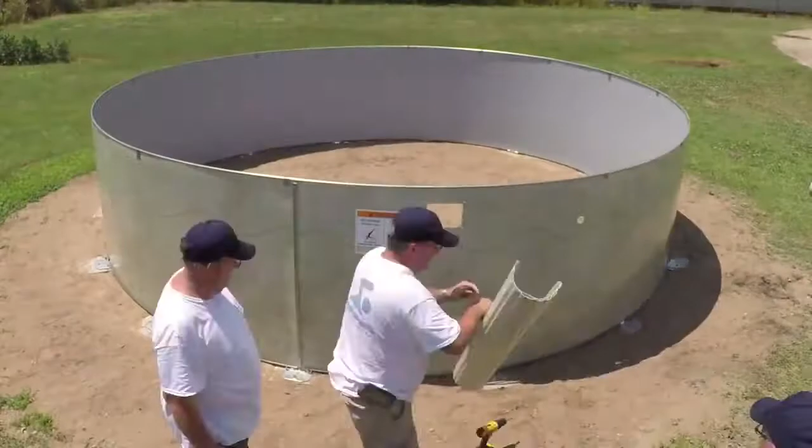It takes 2 to 3 days to install your pool, and it's important that you take your time. If you intend to have an optional special purpose deep swimming area, you'll need to allow more time for your pool installation. HII is not affiliated with any professional pool installer. Therefore, HII can assume no responsibility for errors in installation by either the homeowner or by said professional installers.

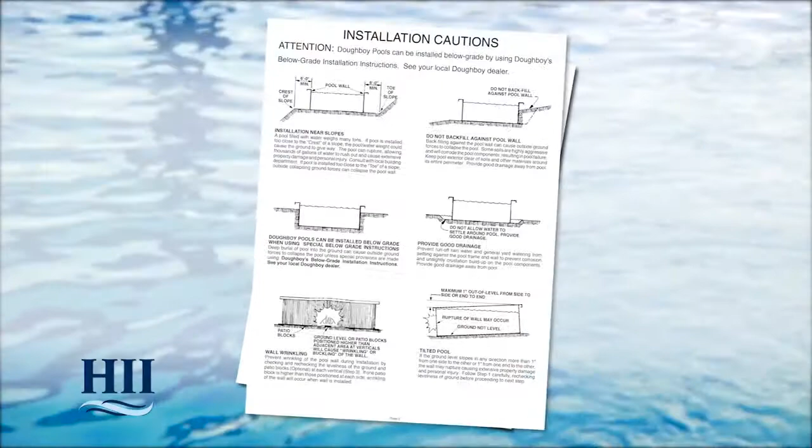If you have the pool installed by others, please supervise the installation process to make sure they comply with the steps we've shown. This installation video is designed to supplement HII's pool assembly and installation instructions for your style of pool. This video does not replace the written instructions.

Be sure to read all instructions, including those for accessories such as filters, pumps, and skimmers prior to starting your pool assembly. Check to see if building permits or utility clearances are required, and obey all codes for fencing and electrical safety.

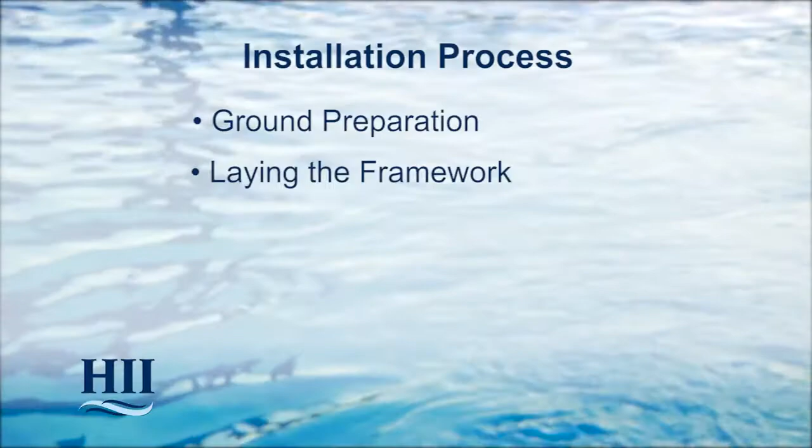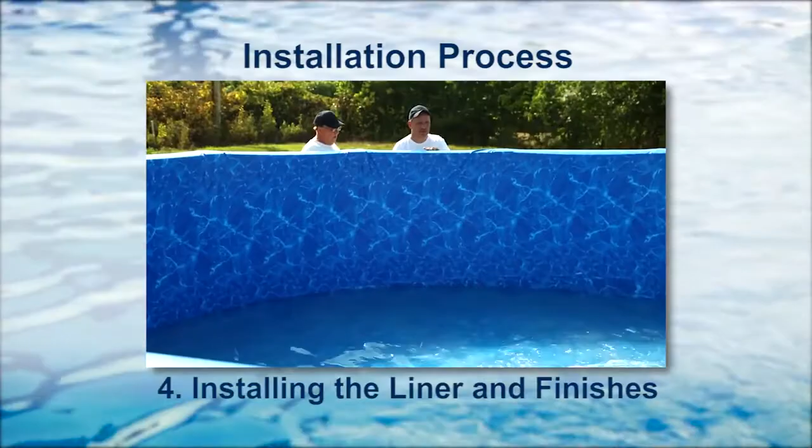The installation process is divided into 4 parts. The first and most important is the ground preparation. Second is laying the framework. Third is installing the pool wall. And fourth, installing the liner and finishing the pool. There are 2 important pieces of information you'll need to have available at all times. The first is the parts list, and the second is the round pool assembly and installation instructions.

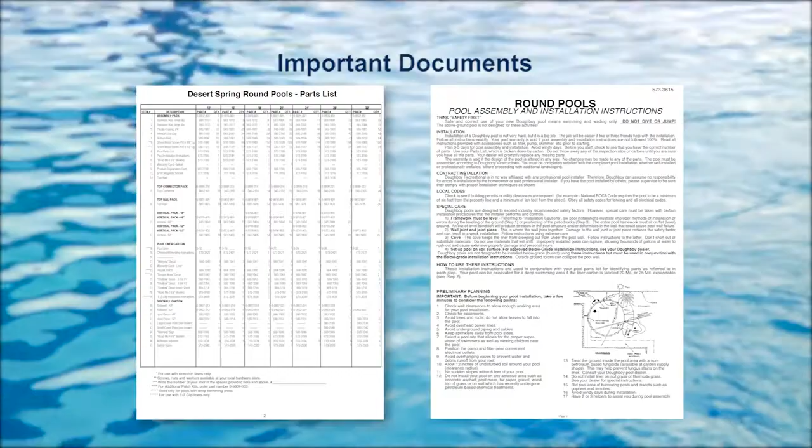Placement of your pool is a very important decision, and there are a few things to consider. Never place your pool under power lines, and stay clear of overhanging eaves which will allow rainwater to run off into your pool. Do not place your pool under trees that will shed leaves into your pool. Choose a spot with convenient electrical outlets for the pump and filter systems, and make sure there are no sprinklers in the area.

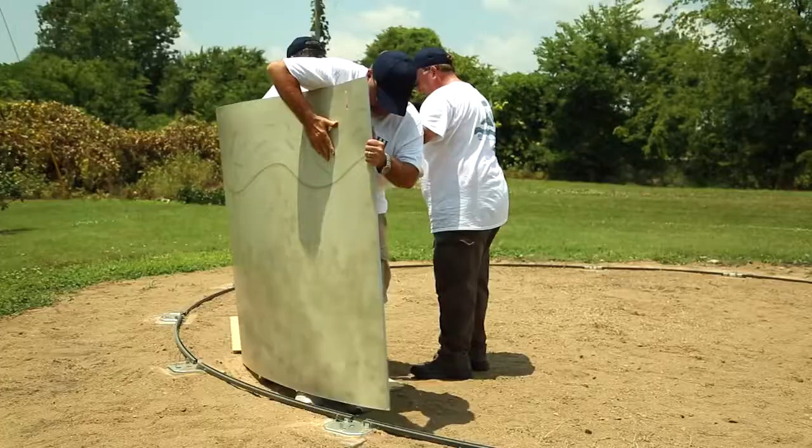Realize that where you begin to install the pool wall is where the ends will meet and is also where the skimmer and returns will be located. You'll have the choice between 2 coves, packed earth or preformed manufactured. If you choose the earth cove, you'll need enough earth to build a 6-inch by 9-inch cove around the base of the pool wall. This video will go into greater detail about the cove later.

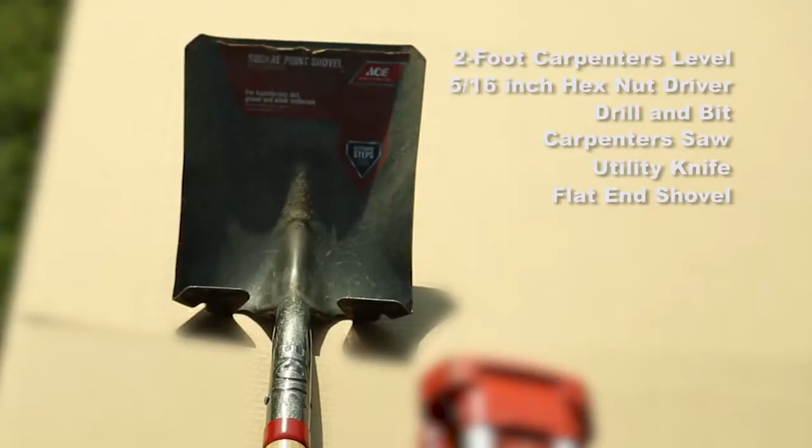In addition to the following tools, check to make sure you have the tools listed in your pool assembly and installation instructions before you start the installation. You will need a 2-foot carpenter's level, a 5/16-inch hex nut driver, drill and bit, carpenter's saw, sharp utility knife, and a flat end shovel to help with a more precise excavation.

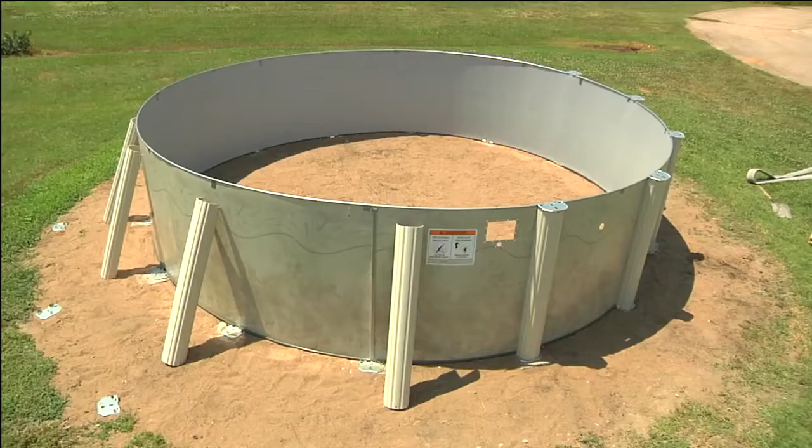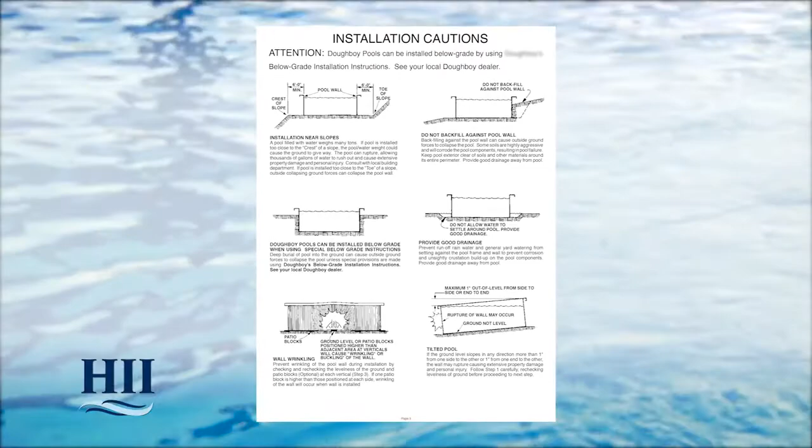A transit or builder's level is recommended to help with leveling the pool site. 12 by 12 by 2 patio blocks can be used under the verticals for additional stability and a more finished look. It's important to review the installation cautions portion of your instructions to see examples of things to avoid during the installation process. The pool design you have chosen is a round pool. Some of the sizes are different, but the parts all go together the same way.

For the round pool layout, you'll need to measure the diameter of the pool plus 1 foot for additional clearance. Begin by pounding a stake in the center of the chosen pool area. Then measure and mark out the appropriate clearance radius for your size pool, found in the pool layout dimensions section of the instructions. Next, remove all sod from the marked pool area. Your entire area should be within 1 inch of being perfectly level.

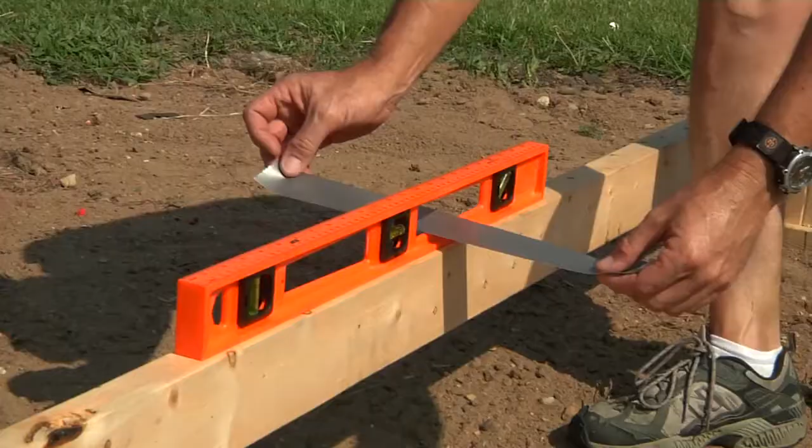It's very important to have the entire pool area as level as possible, so we're going to show you how to make a leveling tool. Drill a hole in the end of a 2x4. The length of the 2x4 should be the same as the radius of your pool. Attach the 2x4 to the center stake as shown. With a level taped to the 2x4, find the lowest area in the pool and remove all high points. Do not fill in low spots. The ground in this area must be firm.

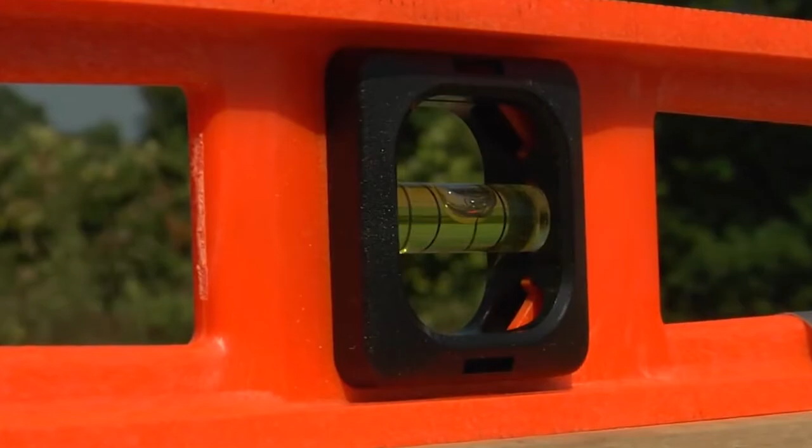Using your leveling tool and a square shovel, clear a 1 foot wide strip until you have a level reading all the way around the pool. This is where the pool frame will be installed. Remember, the entire assembled bottom rail framework must sit on solid ground that is within 1 inch of being level from side to side.

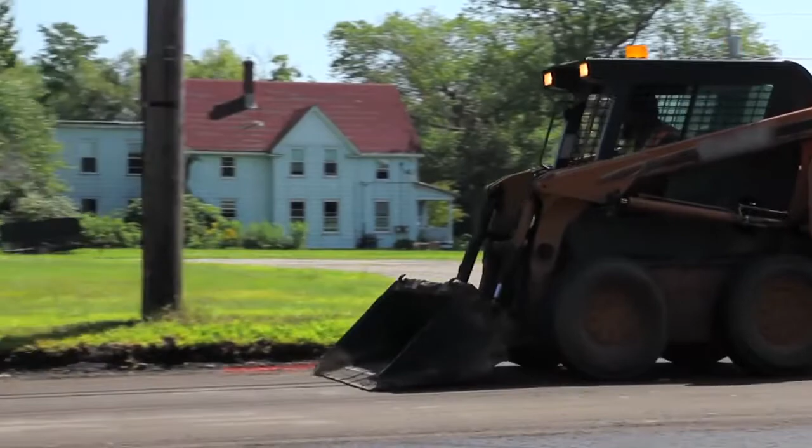And be sure that the entire level pool floor area is clear of any sticks, stones, tree roots, or any other objects that might puncture your pool liner. If available, you might consider hiring a contractor with a tractor or skid steer.

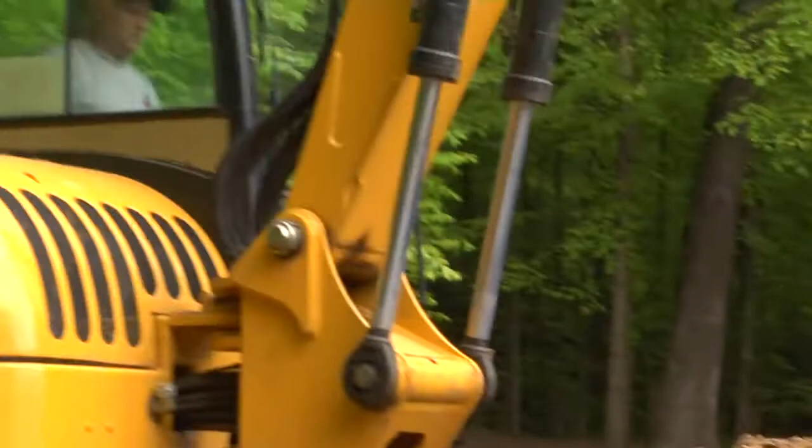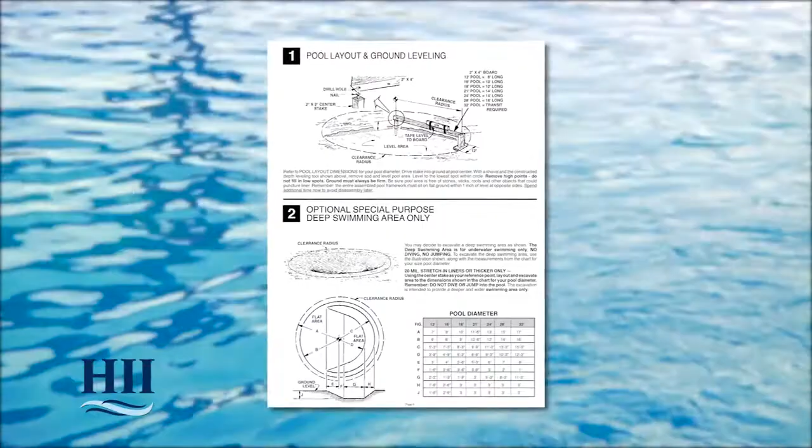If you have purchased a 20 or 25 mil thick expandable liner, you may excavate an optional special purpose deep swimming area at this time. Remember, this area is for underwater swimming only, no jumping or diving. For more detailed information regarding your optional special purpose deep swimming area, consult your instructions.

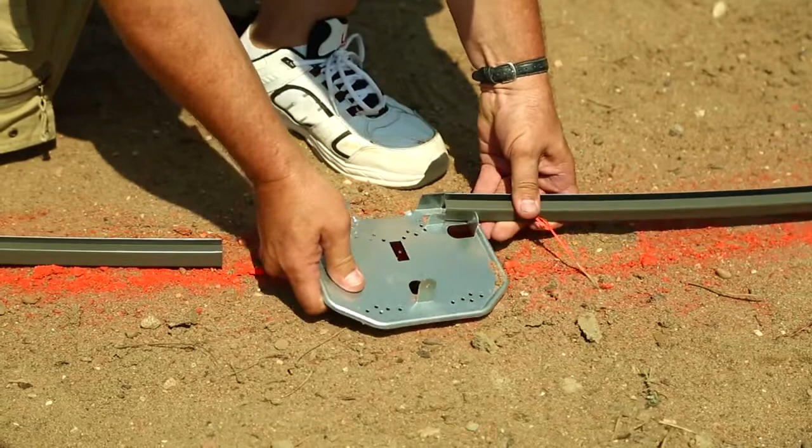Once you're sure that the pool area is within 1 inch of being level from side to side, you're ready to assemble the framework. This is a vertical end cap. This is a bottom rail. These will be used to assemble the bottom framework of the pool. Now construct the bottom framework by sliding the bottom rail's grooves up into the vertical end caps against the stop tab.

Continue all the way around the pool until all bottom rails are connected. With the bottom rails installed, check for roundness by measuring out from the center stake to the bottom framework. The distance should be the same from every point.

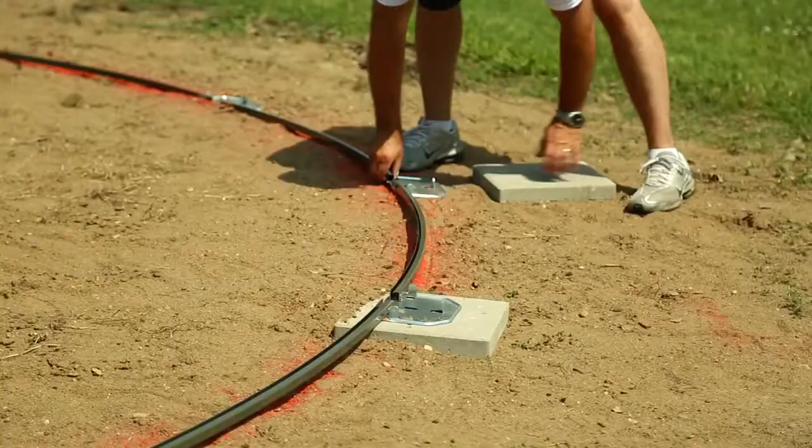Now that you have checked the pool for roundness and you can see where the end caps are, you can start installing the patio blocks. The top of the blocks must be flush with the ground and must be centered under each vertical end cap. To do this, mark out where the patio block is to be placed. Dig out this area.

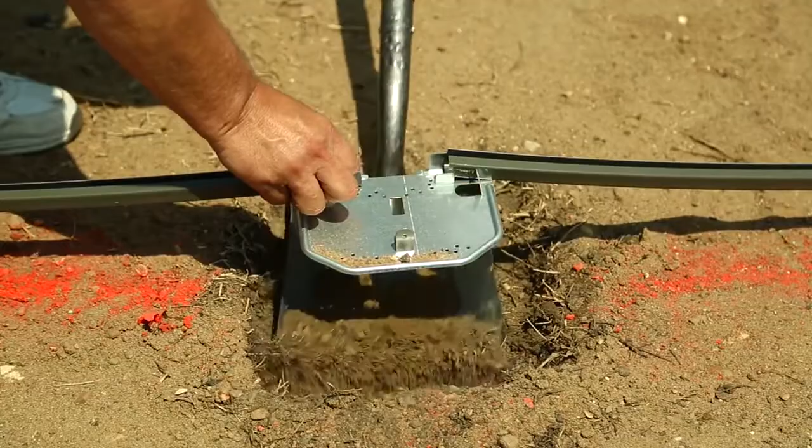Position the patio block and then check to see that it's level. If it isn't level, adjust accordingly until a level reading is obtained. For proper installation, it's also important to level from patio block to patio block, as shown here.

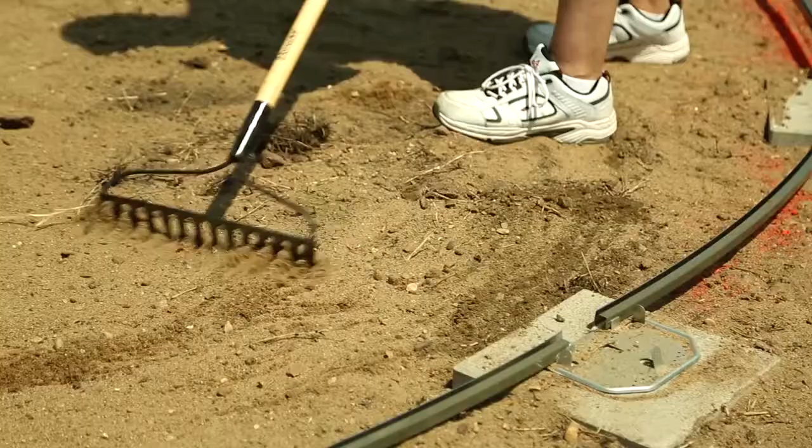Now that the bottom framework is assembled, make sure that the bottom rail is round and level before proceeding. Also make sure that there is no dirt inside the bottom rail. If there is, clean it out before proceeding. Before we go into the installation of the pool wall, remember to clear the pool floor area of any debris that could puncture the liner.

If you're going to use an earth cove, now's the time to bring the sifted earth into the pool area. Use a sifting screen to remove 1/8 inch pebbles or larger as shown here. When you're finished, remove one section of the bottom rail and wheel the earth into the center area. Once you have a sufficient amount of sifted earth, remove the wheelbarrow and replace the bottom rail section. You are now ready to install the pool wall.

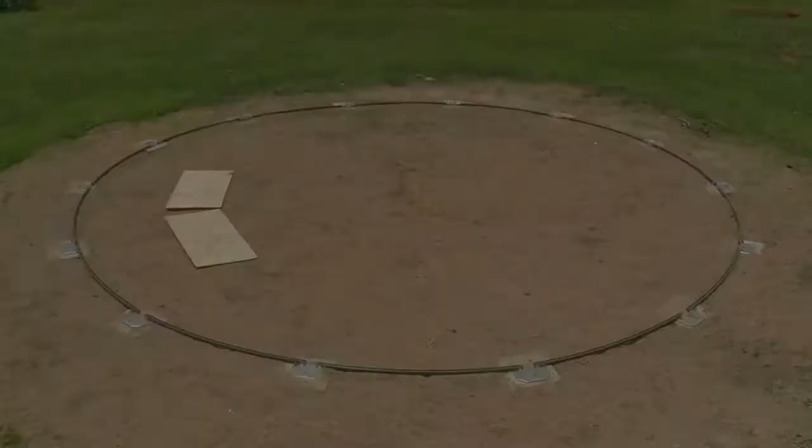Before you remove the pool wall from the carton, take note of weather conditions and do not install your pool wall on a windy day. Place the wall carton near the starting point you selected during preliminary planning. Remember, you must begin the wall near an electrical outlet for the pool filter. Place the wall carton with the arrow facing upwards onto a piece of plywood. This will make it easier to move the wall during installation.

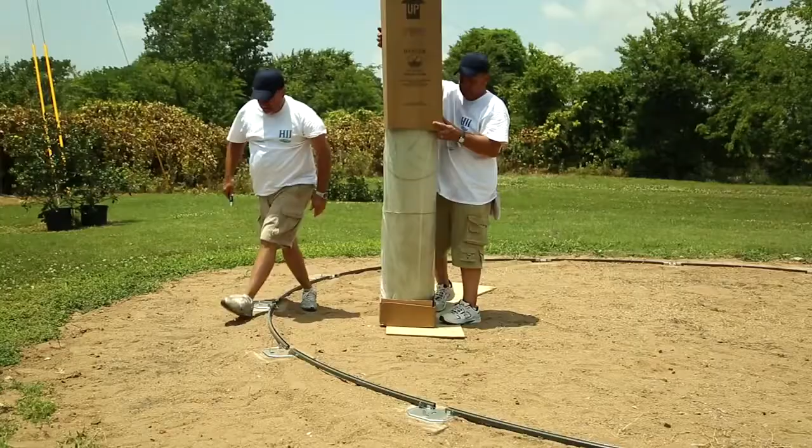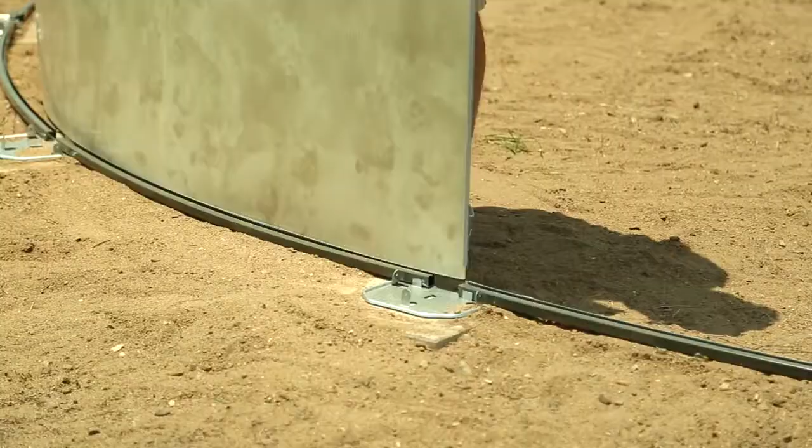Using a sharp knife, cut around the carton's bottom edge, then lift the carton over the coiled wall. Position the pool wall inside the framework and near the starting vertical end cap. Always start at the center of the vertical end cap so the vertical will hide the wall joint. Uncoil about 6 to 10 feet of the wall at a time and insert the bottom edge of the wall into the groove of the bottom rails as you go forward. Placing the coil on overlapping pieces of plywood will make it easier to unwind the wall.

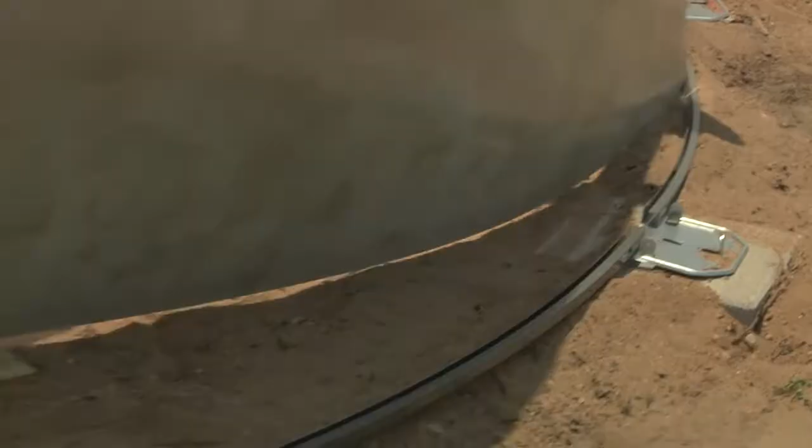As you unwind the wall clockwise around the pool, you'll find the skimmer and return openings at the inside of the wall coil. Place the stabilizer rails on the top edge of the pool wall. Work around the top of the pool as the wall is inserted into the bottom rails. Telescope the small stabilizer rails into the larger stabilizer rails about 6 inches. Temporarily secure the stabilizer rails to the pool wall between verticals using duct tape.

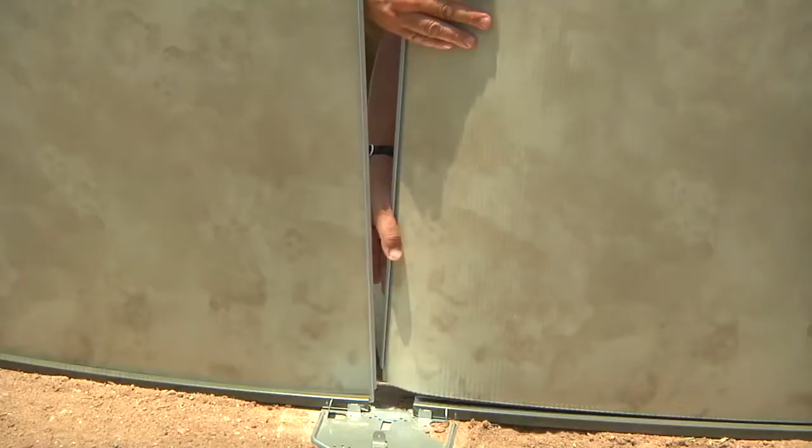Bring the wall ends together until they meet in the center of the starting vertical end cap. Adjust all of the bottom rails in if the wall ends do not meet. Bring the pool wall ends together to the inside bottom rail and align the formed hooks.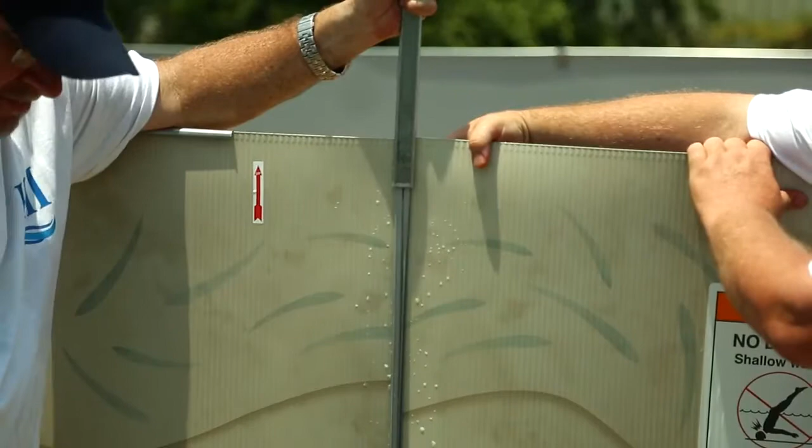Once the formed hooks are aligned, slide on the joint piece until it's even with the top of the wall hooks. This will place it a little below the top of the pool wall. Whatever you do, do not hammer on the joint piece. You may use ordinary dishwashing liquid for lubrication.

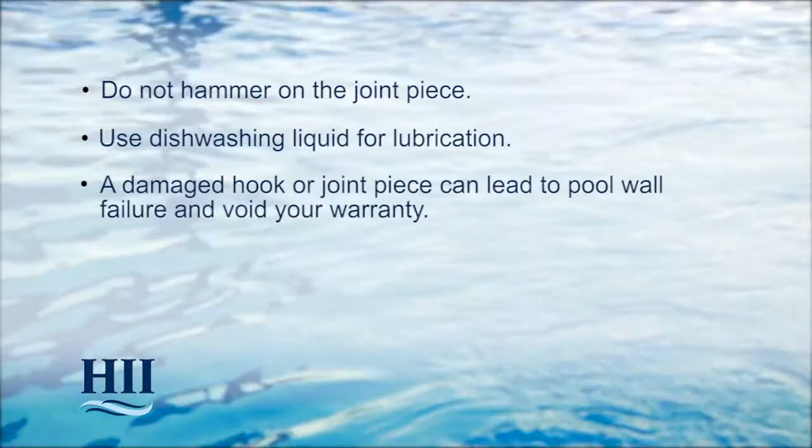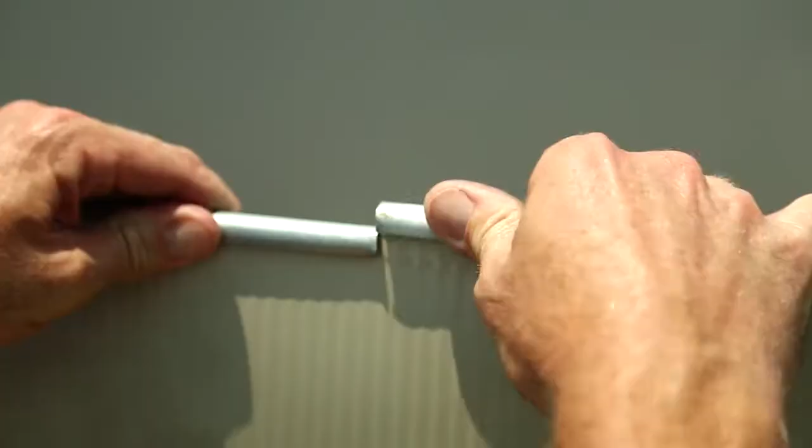A damaged hook or joint piece can lead to pool wall failure and void your warranty. Once the joint piece is installed, insert the wall back into the bottom rails. Place a piece of duct tape over the wall joint and reinstall the stabilizer rails.

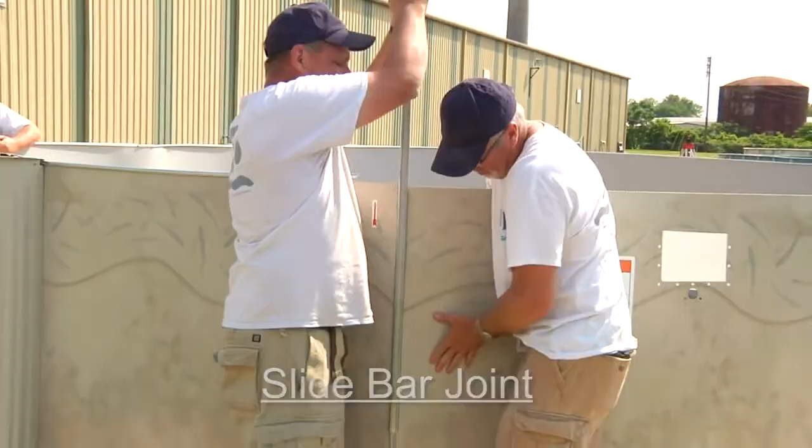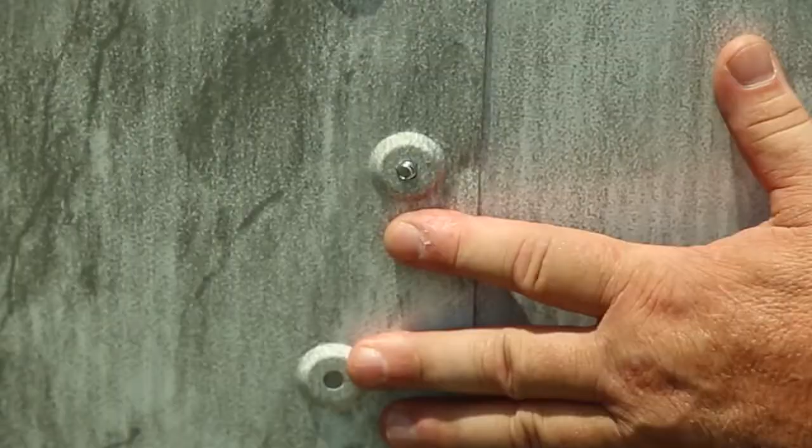HII manufactures several brands. As previously shown, one of our brands uses a slide bar joint to connect the wall, while our other brands use a nut and bolt closure system. This fastening system provides excellent strength and wall stability and has pool wall ends that virtually snap in place for proper alignment during assembly. This design also positions the bolt heads to be flush with the inside of the pool wall for a smoother liner installation.

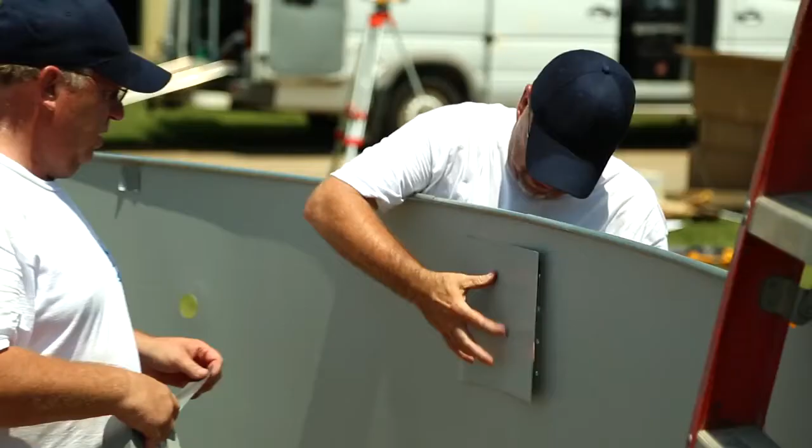Matching pool wall cover plates are provided with pools that have 2 skimmer openings. If you choose to use only one set, you'll need to cover the extra holes from the inside with the provided matching wall cover plates using duct tape. Be sure to cover all the inside edges and corners of the wall plates with additional duct tape.

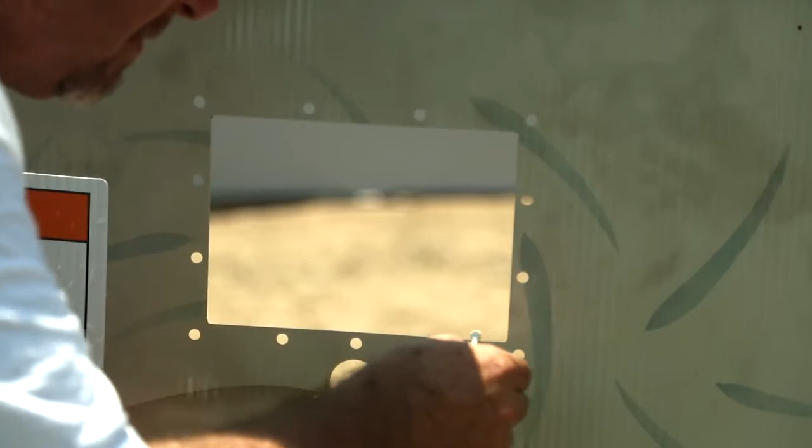Use a Q-tip or cotton ball dipped in fast-drying enamel to coat all bare or metal edges of the skimmer opening, protecting them against corrosion. Do not use your fingers to apply this coating, as sharp edges may cause serious cuts. Enamel must dry prior to installing the liner to prevent damage to the liner.

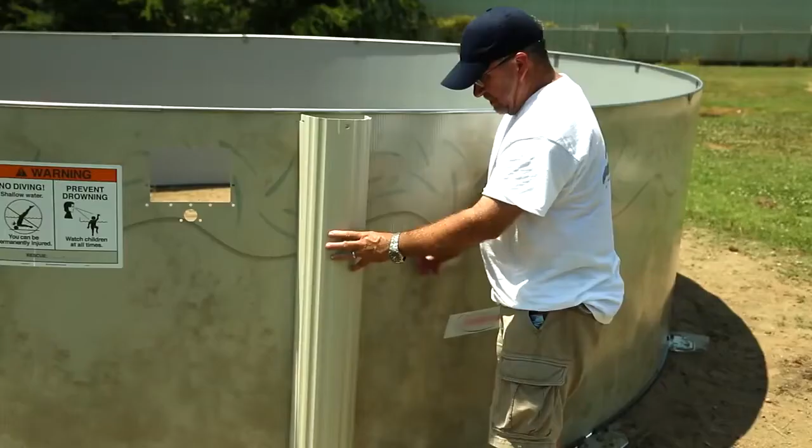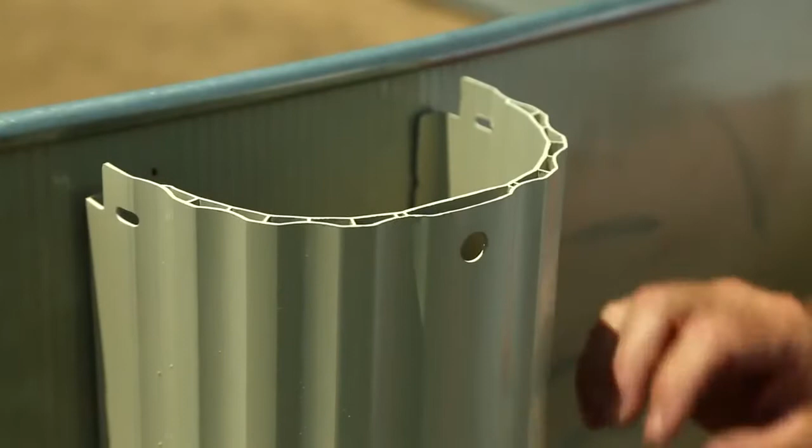Some pool styles have one-piece verticals, while other pools have larger top rails requiring three-piece verticals. To assemble three-piece verticals, simply slide the centerpiece into the grooves you'll find on each side section. Please note that 6-inch, 7-inch, and 8.5-inch top rail pool models typically have 3 holes at the top of the verticals.

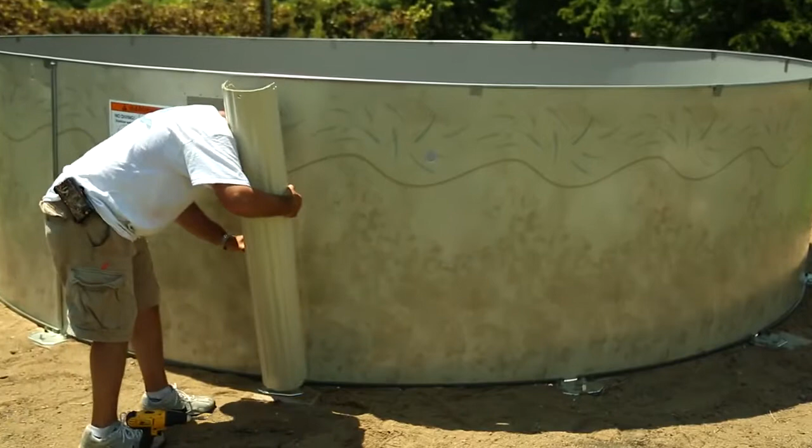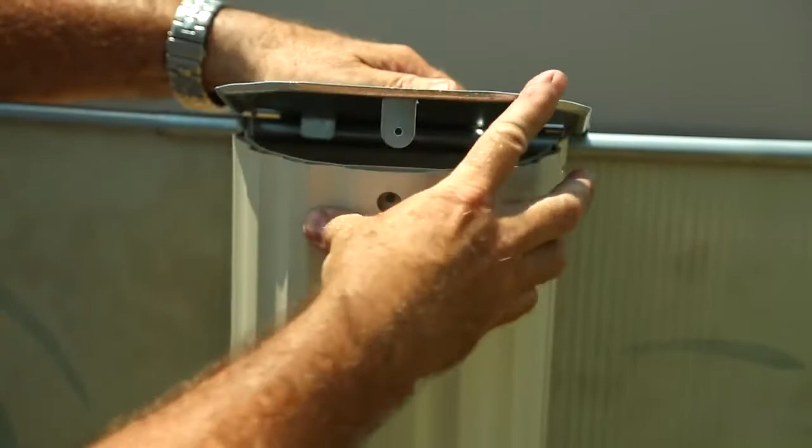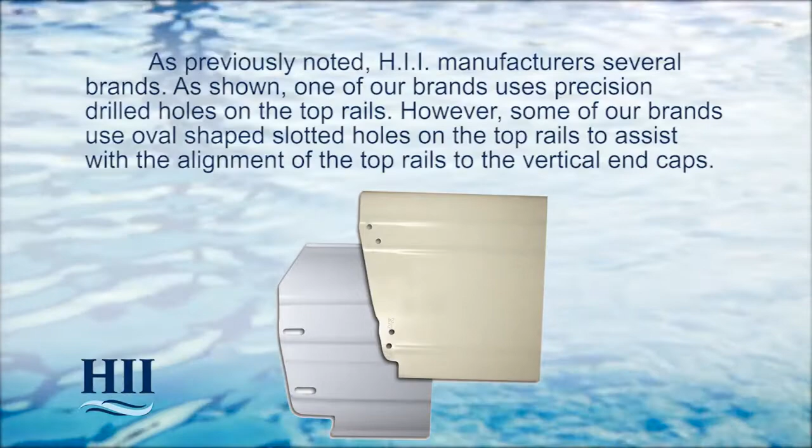Check the instructions for your style of pool and place the verticals over the tabs of the bottom vertical end caps and secure. Take the time to review the vertical and top rail details of the pool you chose in your instructions. Carefully follow figure 7, A, B, C, D, or E to attach the top vertical end caps to verticals. Check the pool for roundness by measuring the pool from side to side in opposite directions.

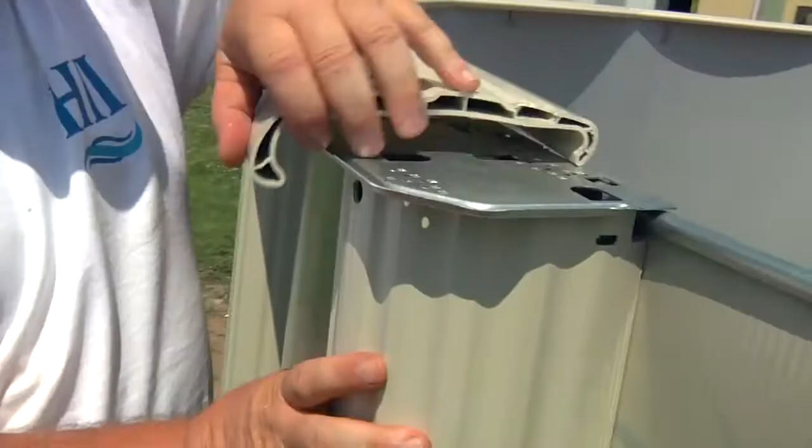Top rails attach between the vertical end caps. After referring to the hole selection chart in your instructions, use a felt pen to mark the holes appropriate for your pool size on the top vertical end caps and top rails. This will help avoid confusion when you attach the top rails.

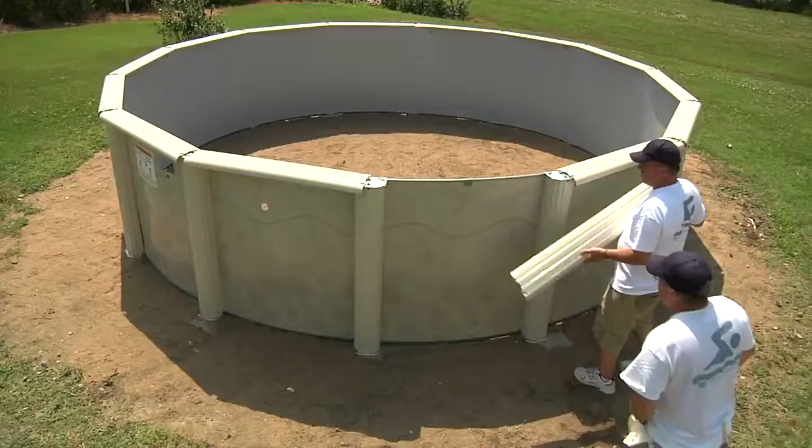Attach the top rails according to the holes that you marked, and be sure you're using the correct holes for your pool. Some pools have a bracket that attaches the top vertical end cap to the top of the vertical. Check the instructions to see if a bracket of this type applies to your pool.

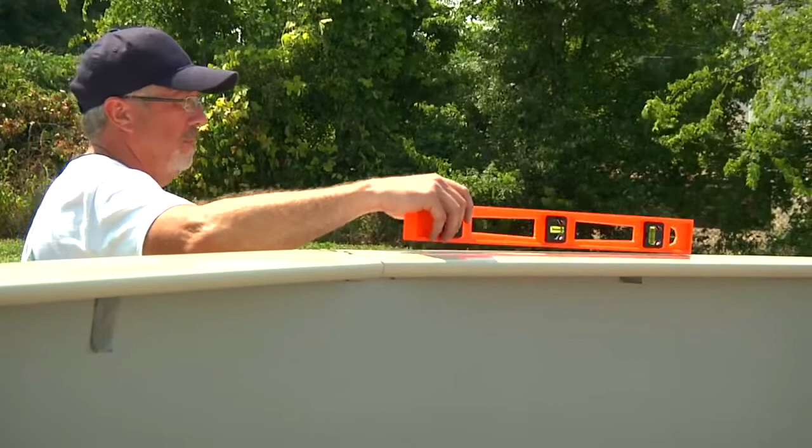After you've attached the top rails, it's extremely important to check the framework to assure a level installation. Place the level on each top rail, working gradually around the pool to assure framework is within 1 inch of being level on opposite sides. And remember, always remove dirt to adjust framework, never fill in.

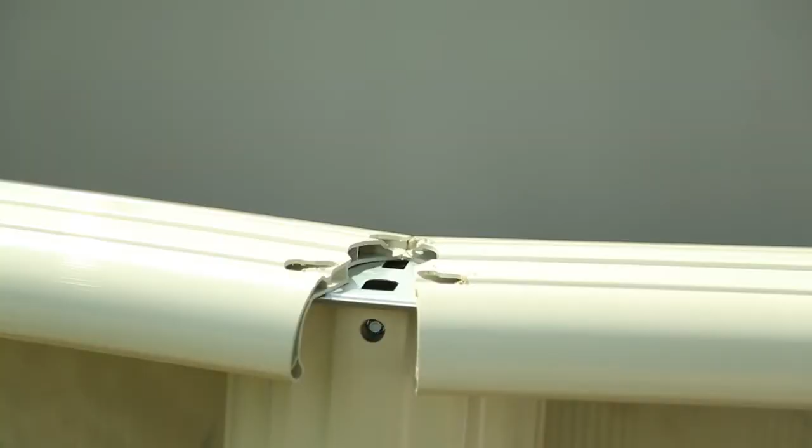This is where the pool frame will be installed. Remember, the entire assembled bottom rail framework must sit on solid ground that is within 1 inch of being level from side to side. The top connectors are installed over the top rail junctions. If you're installing another category of pool, some of what we show you may differ slightly. If your pool has outer connector skirts, they attach to the bottom of the top connector. Consult instructions for exact directions.

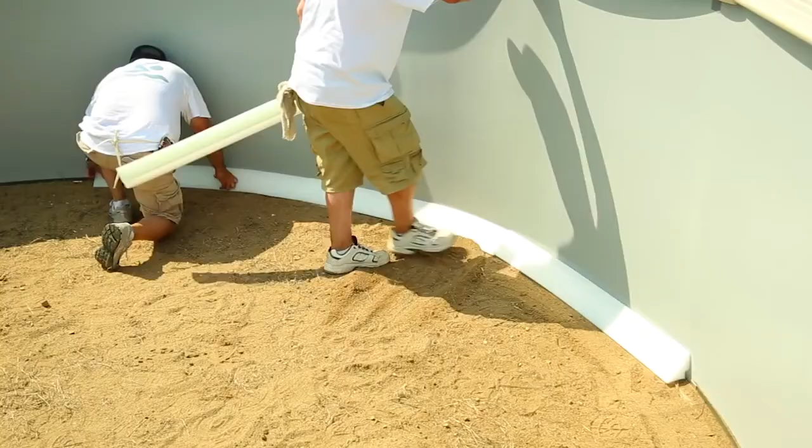You may want to use an earth cove as demonstrated, or you can purchase a manufactured pre-formed cove. You may also want to consider a manufactured floor covering to add additional protection for your pool liner. The manufacturer accepts no responsibility if earth cove or pre-manufactured cove is omitted.

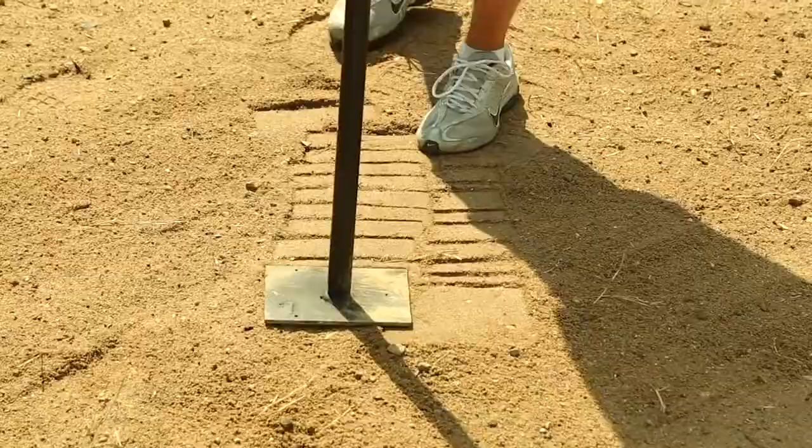Before you install the liner, once again make sure the pool is smooth and clear of sticks, stones, or other sharp objects, and fill any slight depressions like footprints with sifted earth and tamp down. If you intend to install an easy clip or beaded liner, follow the instructions that are packed with it at this time.

Begin the liner installation by placing the liner on the top rail, allowing the loose end to hang about 12 inches over the outside of the top rail. The embossed or printed side of the liner is the water side.

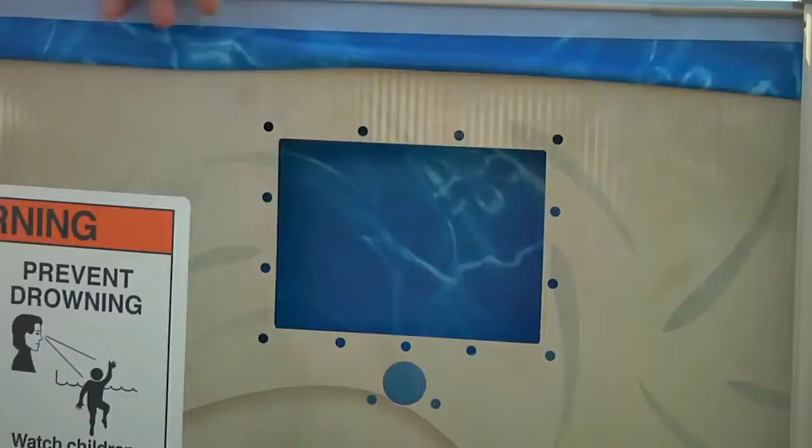With help from your friends, start to unfold the liner down the center of the pool. Work in both directions from the point where the liner is overhanging. Drape the liner over the top rails and down the sides of the pool approximately 24 inches. Do not place the liner side seam over the skimmer or return fitting openings, which may cause the gasket not to seal properly. If you're installing a liner into an optional special purpose deep swimming area, refer to step 14 in your instructions.

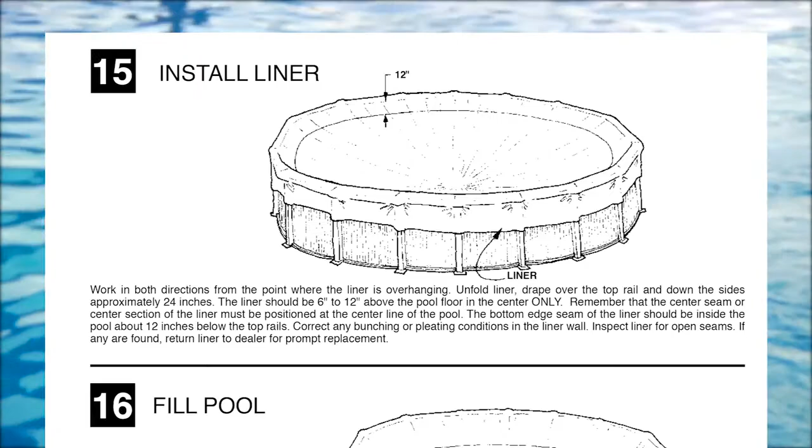Before proceeding to step 15, make sure the liner's item number matches the item number on the carton. The item number is located on the smooth side of the liner at the intersection of the side seam and bottom seam. Write down the liner item number and keep it with your warranty information. This information will be helpful if there is an issue with your liner in the future.

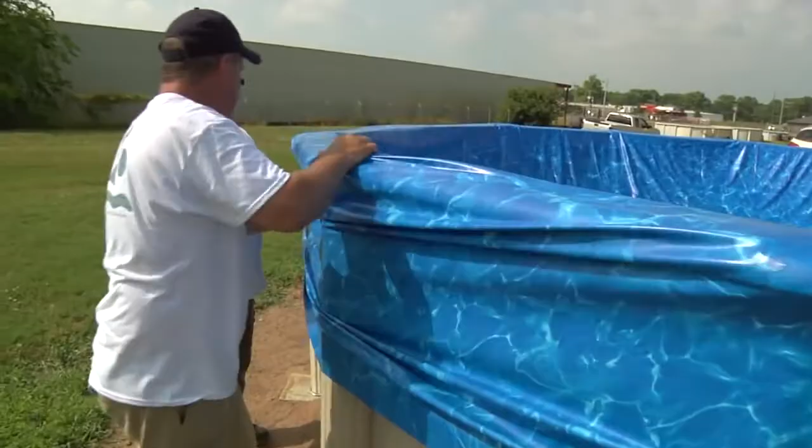With the liner draped over the top rails and down the sides of the pool approximately 24 inches, the liner should be 6 inches to 12 inches above the pool floor in the center only. Remember that the center seam or center section of the liner must be positioned at the center line of the pool. The bottom edge seam of the liner should be inside the pool about 12 inches below the top rails.

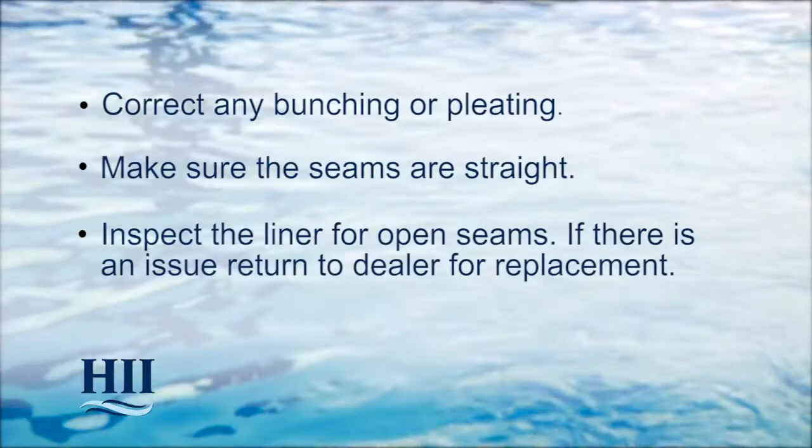Correct any bunching or pleating in the liner wall and make sure the seams are straight. Inspect the liner for open seams, and if any are found, return it to the dealer for a prompt replacement. Once the liner is in position, secure it to the underside of the top rails by placing a small piece of cardboard over the liner and attaching a binder clip to the cardboard. This will keep the liner in position and allow you to adjust the liner tension as the liner fills.

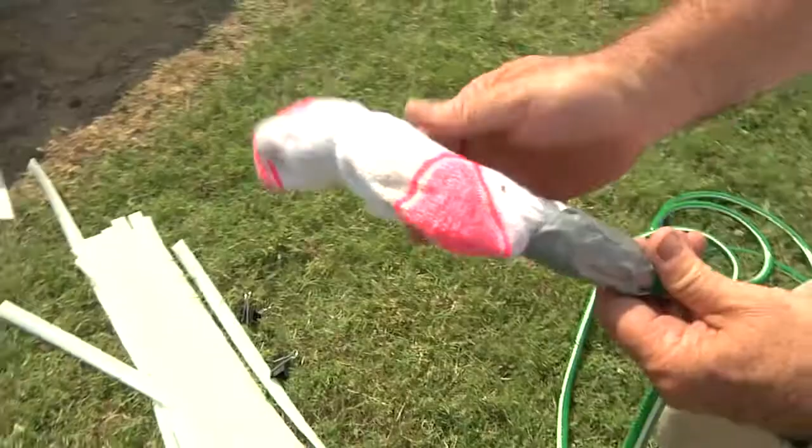Now it's time to fill your pool. Cover your garden hose with a sock or rag and secure with duct tape. This will protect the liner against potential punctures from the hose end. As the water begins to cover the bottom of the pool floor, the liner will stretch.

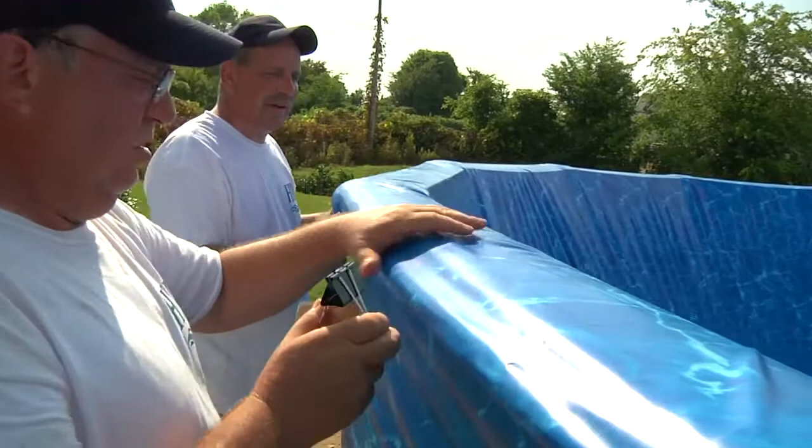Periodically, adjust the tautness in the liner by releasing the binder clips and gently feeding the liner back into the pool. Be very careful not to snag the liner on the framework. Continue in this manner all the way around the pool, reclamping the binder clips after adjusting the liner. Never allow the liner to fall back into the pool. Water between pool wall and the liner can cause pool failure. Refer to your instructions before making any liner adjustments.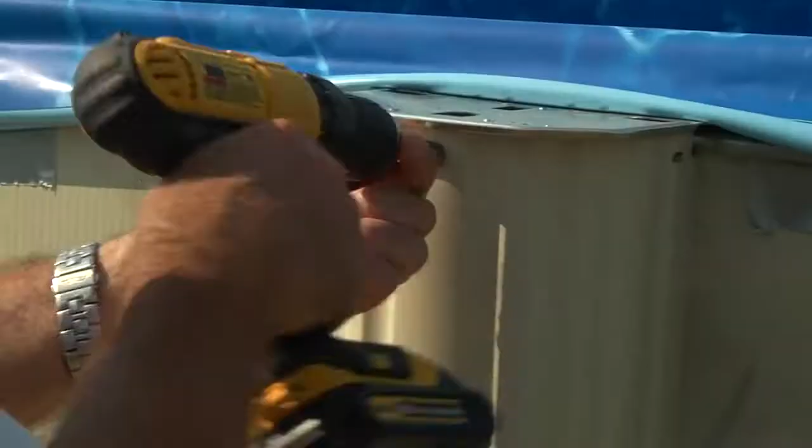Stop filling when your pool has accumulated approximately 24 inches of water up the pool wall. Do not make any cuts in the liner until instructed to do so. With the help of 2 or 3 of your friends, lift the liner from 3 top rail sections. As they lift the liner, remove the attaching hardware at the top rail connectors from the top 3 rail sections and each of the stabilizer rails attached to the top of the pool wall. Be very careful during this process to be sure the liner doesn't fall back into the pool.

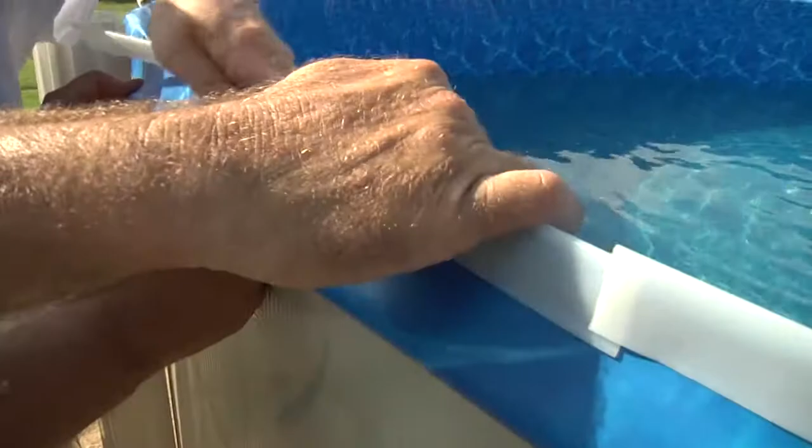Now make a hem in the liner like this one. Smooth the hemmed liner against the wall and pull the liner to the outside of the pool. Secure the liner to the top of the wall using your 24-inch plastic coping strips. Place the stabilizers back over the plastic coping and reinstall the stabilizer rails, remembering to telescope the small stabilizer rails into the larger stabilizer rails about 6 inches. Continue in this manner all the way around the pool to finish attaching the liner to the pool wall.

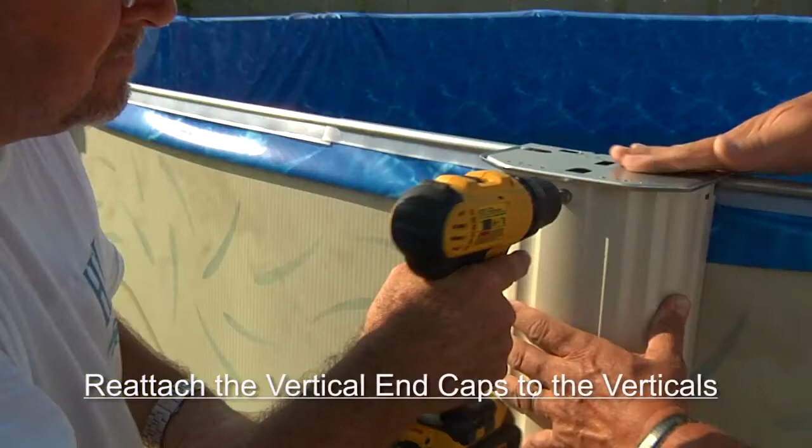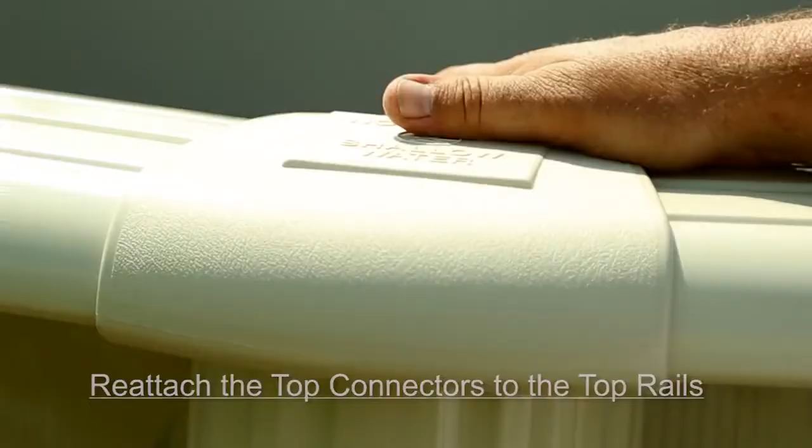With the pool completely assembled, locate the skimmer opening in the pool wall and install your skimmer using the installation instructions found in the skimmer carton. The skimmer openings in the pool wall have been specifically designed to fit an HII skimmer. Install the pump and filter using instructions found in their individual cartons. Finish filling the pool to the correct levels indicated on your skimmer's faceplate.

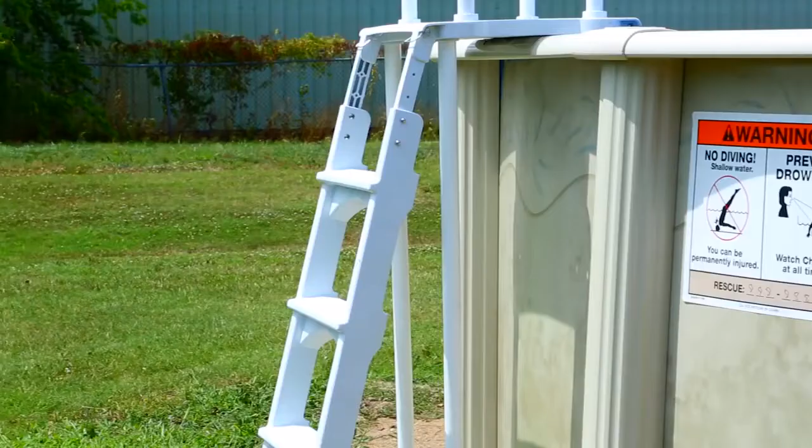Now that you have installed your new pool, HII would like you to know that we're very concerned about your safety. We have provided you with an assortment of safety literature with your new pool. You'll have years of fun and enjoyment with your new pool, but it's also a big responsibility. Please take the time to learn, understand, and follow all of the safety rules and regulations. We've also provided safety stickers, signs, and decals. It's mandatory that you place them in the appropriate locations around your pool.

After you've installed the skimmer, return, pump, filter, and have placed all the decals, all you have left to do is fill her up. Enjoy your pool for years to come.